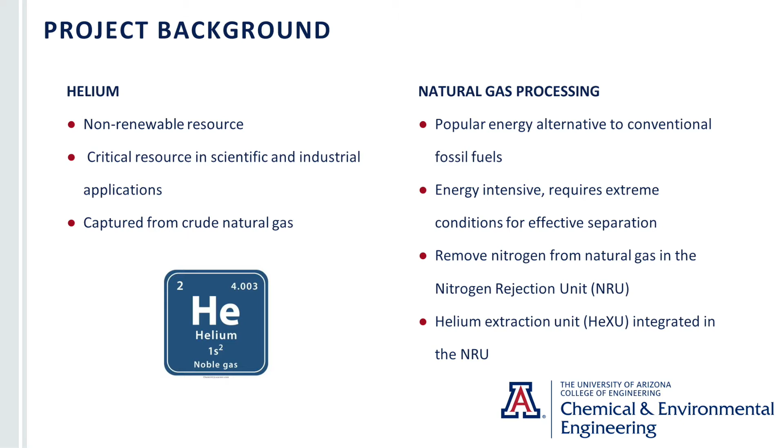The main source of helium is from natural gas. Some helium can be found in air, but it's currently too expensive to capture helium from air, so natural gas is the main and largest source. Although natural gas emits less harmful pollution when burned, purifying the natural gas requires a large power input. This power input usually comes from other fossil fuels. It requires such a large power input because we need to obtain pretty extreme conditions for a good separation.

The objective of this project is to design a process for helium recovery from natural gas by using a double separation column cycle and cryogenic distillation technique. We want to process 50 million standard cubic feet per day of pipeline gas to a 98% composition methane stream, and we want to recover 96% of the helium and send that out at a composition of 65%.

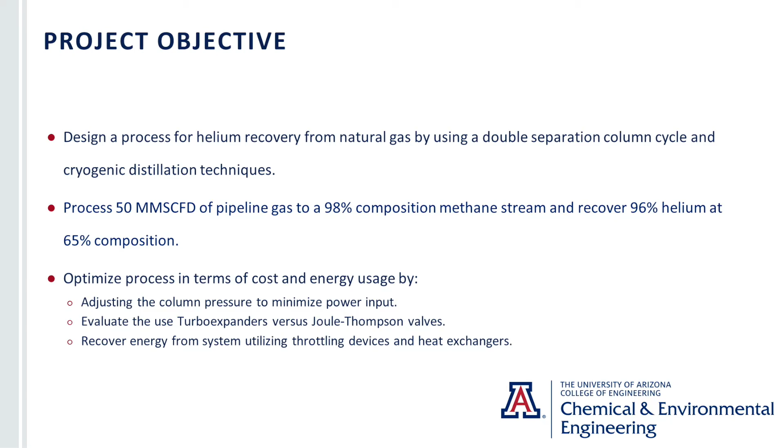We also want to optimize our process in terms of cost and energy. To do this, we were adjusting the column pressure to minimize the power input across the distillation columns. We evaluated the use of turbo expanders versus Joule-Thomson valves. And we recovered energy from the system by utilizing throttling devices and heat exchangers. Now we will go into the process design.

After being extracted from the ground, the natural gas will go through two pre-treatment stages where impurities such as water, carbon dioxide, and sour gases will be removed. It's important to remove these before entering the nitrogen removal phase of the refinement process because they will freeze downstream in the high pressure and low temperature cryogenic operating conditions.

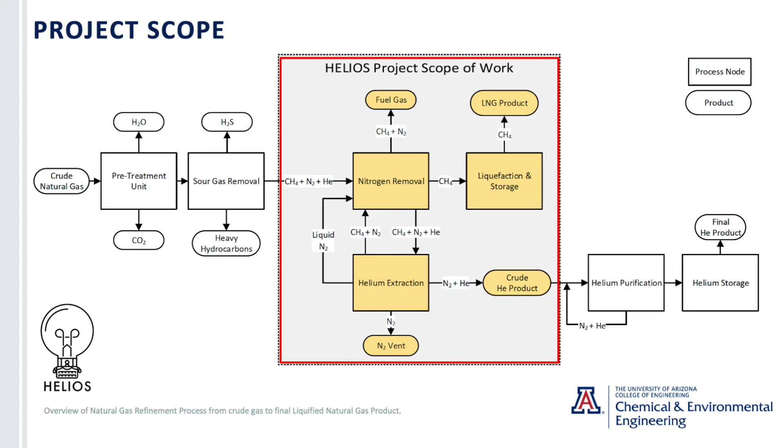The scope of work for the Helios project covers the nitrogen removal phase of the refinement process. This is sometimes referred to as a nitrogen rejection unit. However, it is a system of multiple pieces of equipment. There are two design alternatives that were evaluated in an attempt to recover the maximum amount of energy from the process. By removing the maximum amount of energy that we can from the system, we're able to also reduce the power input required and the cost of adding additional refrigeration loops to lower the temp of the feed.

We compared a turbo expander gas turbine and a butterfly valve, which both throttle the gas, expanding it rapidly and quickly dropping the pressure of the feed. This is also known as the Joule-Thomson effect and was the primary means of removing heat from the system to get it to the cryogenic conditions required for separation.

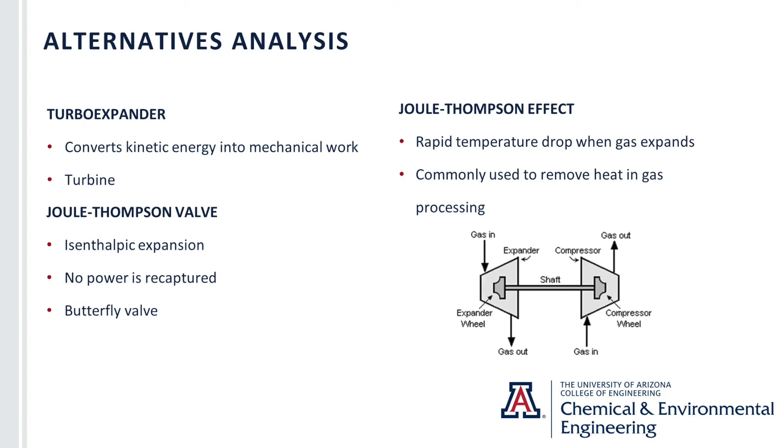This is an overview of the equipment in our system. The process feed starts at stream 1, where it is fed then through a heat exchanger and turbo expander to remove as much of the heat and energy as possible before being fed into the double column cycle.

In this cycle, the methane is liquefied into liquid natural gas product that can be shipped and sold, and the helium and nitrogen are removed, and the nitrogen is then liquefied to separate the helium. Liquefied nitrogen and liquefied natural gas are then fed back through the heat exchanger at the beginning of the process to remove heat from the feed to the system.

Now we will talk about the column optimization. The distillation column is the heart of our process. This column allows us to separate methane, nitrogen, and helium. Since it's the heart of our process, it comes with a high capital cost and operating cost.

We optimize the columns by messing with the pressure in the columns to get the best operating cost. First we started at high pressure and then we worked our way down to low pressure. So with this information, we determined that we would like to run our column at around 1,000 kilopascals to 1,500 kilopascals. This is the area where, on the chart to the left, you can see that it has the lowest energy consumption, thereby making it

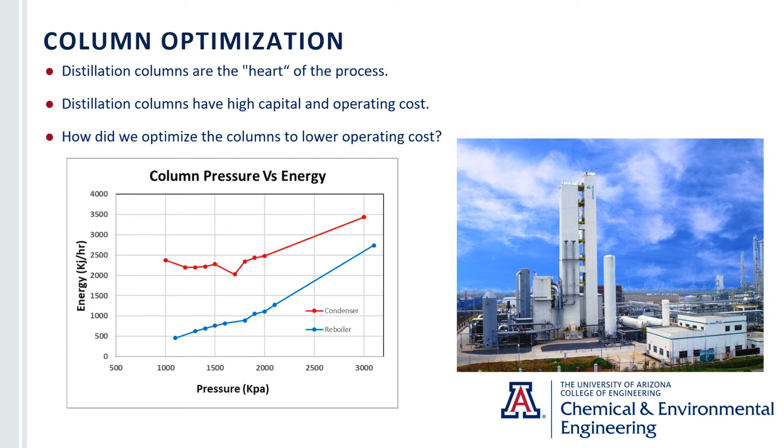lower operating costs. Next, we will talk about the Joule-Thomson effect in valves versus turbo expanders. Joule-Thomson is fundamental in cryogenic processes. It gives us the option to cool the streams without having to use external sources. As you can see on the table below, the main difference is the cost, size, and the energy gained from the turbo expander that does not happen in the butterfly valves.

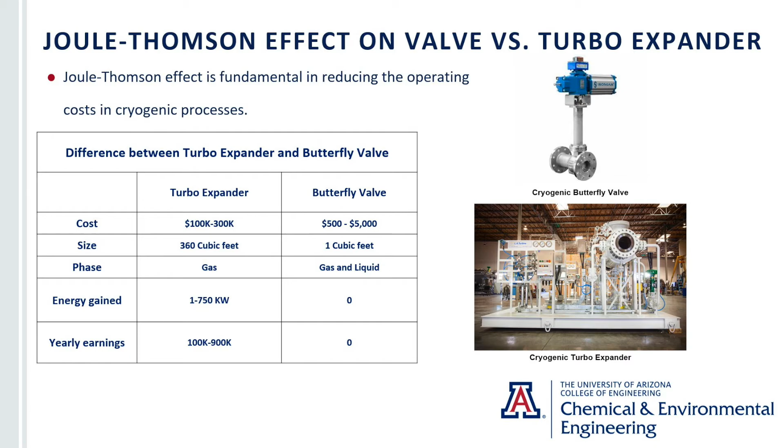So now the question is, how did we determine between using a valve or a turbo expander? The first question we asked was, how does the pressure drop across the turbo expander and the butterfly valve compare? The turbo expander exceeded the butterfly valve in every single pressure drop we put it through.

The next question was, how does the inlet temperature affect the Joule-Thomson effect over the turbo expander and butterfly valve? The turbo expander had a larger delta T compared to the butterfly valve at every single inlet temperature until it reached about -80, and this is when the butterfly valve and the turbo expander became equal. From this information, we determined to use an inlet temperature of -70 to get the most effective range.

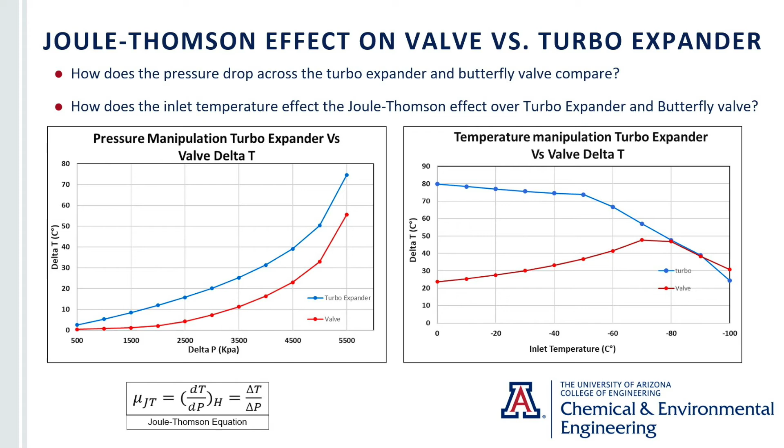Now that we have concluded our project and gone over what makes our design effective and efficient, we have gained some key insights on what we could improve given an unlimited time and budget. Some of the key recommendations are implementing the Linde cycle to optimize our helium extraction, because the helium cycle wasn't the most important process stream that we had to focus on. We didn't really do any optimization, so that is one area where we could become either more purified or even try to get a higher cost base from our separation.

Another thing we can improve on is adding a tunable purity system for our helium stream. Because of the fluctuation of prices for gases, we could create a more purified helium stream, and with that purified stream we could sell for a higher cost based on the market conditions, and with that we can help offset some of the potentially lower methane prices throughout the year, all to reach our profitability, which is truly our end goal with our project.

And lastly, we wanted to actually construct our system and see how viable our plant design was, because sure, we did the simulation and that's great and all, but it really would be great to put our ideas and theory to the test with an actual building.

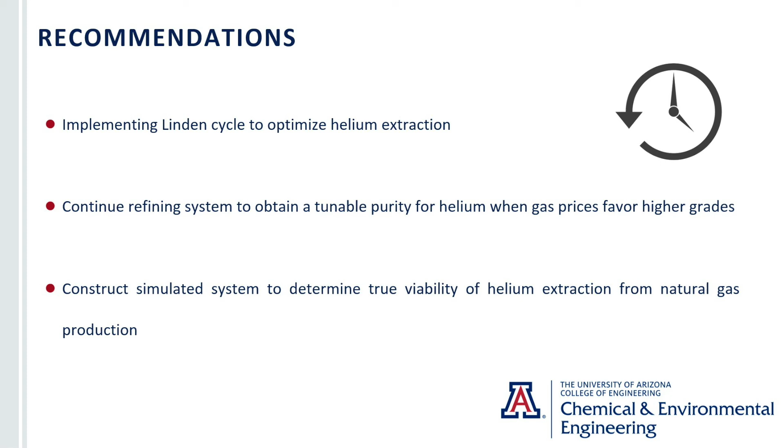Going over what we accomplished with our project, we were able to meet our design goal of 96% helium recovery and a purity of 65% in our exit stream with no more than 2% nitrogen in our methane gas line. We were able to utilize Joule-Thomson valves and turbo expanders to lower operation costs by over 300%.

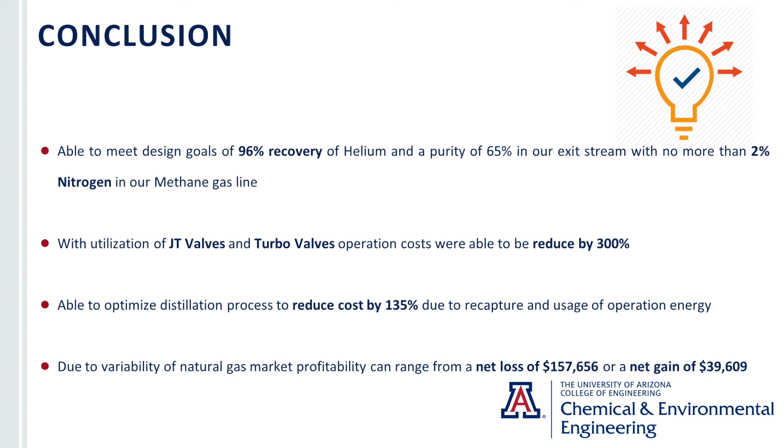We were also able to optimize our distillation process to reduce costs by 135% due to recapture and usage of operational energy. Finally, due to variability of natural gas prices, profitability can range from a net loss of $157,000 to a net gain of $39,000.